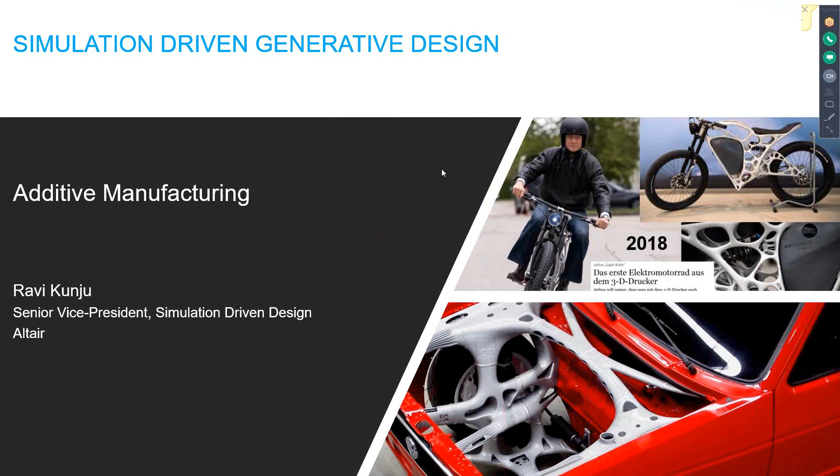Having said that, let's get started. The challenges of designing anything innovative, like what you're seeing on the screen, which is not an automotive component, but it's extremely important to put automotive things into perspective. This is a robotic arm, and the reason I'm showing you this is I'll build on that story in the next few slides.

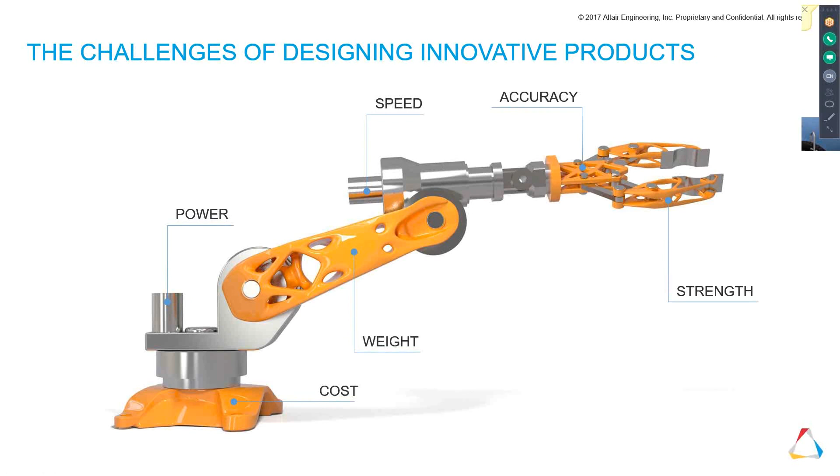Whenever you're making anything complex, something as complicated as an automotive, it's always a combination of balancing between the power, the speed, the accuracy, the strength of this gripper in this case, versus the weight. And when it comes to weight, it's not just the overall weight, but also the distribution of the weight itself, so that there's balance and efficiency in the design. At the end of the day, you also want to make sure that the cost of manufacturing it and the ability to manufacture it are within the controls of what you set up your ideas with. So it's always a balance between these.

And the promise of additive manufacturing is that it gives you a tremendous amount of geometric freedom. You are pretty much free to determine what you want with respect to how you can print them. But of course, there's a lot of other challenges that we'll talk about in the next few slides.

In addition to getting geometric freedom in your design to 3D print any types of shapes that you are not restricted to with undercuts and others, there's also a lot of possibility for part consolidation, where you can put more than a few parts together to make one component and reduce a lot of post-manufacturing and fabrication issues, dimensional accuracy, and tolerances.

The idea here is to create accelerated product development. If you have a good understanding of the performance requirements, you can rapidly create something much more quickly than the traditional process, which can be time consuming in terms of trial and error, build of tooling, and other aspects.

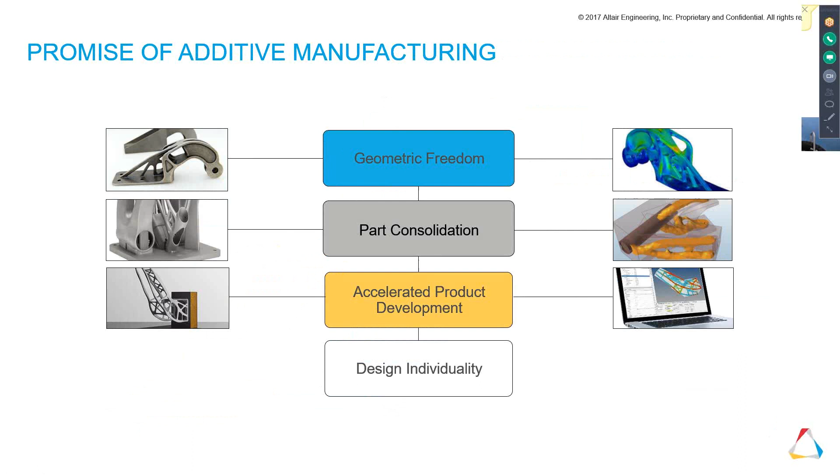The fourth aspect is design individuality, meaning you can create components that are very specific for a specific purpose. The bracket that you see here is an architectural beam, basically a joint and a truss, developed with Arup in the UK.

Very complex structure, lots of parts were consolidated into one. There's a tremendous amount of weight bearing that goes into it, but it's very structurally aesthetic and also a very critical component, and it was all done in one shot, meaning that under certain specific conditions, you can create specific products for specific purposes.

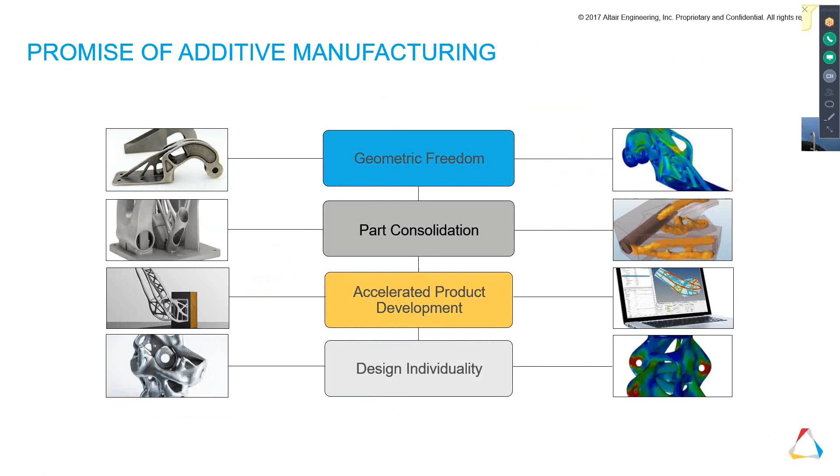So these are tremendously the promise of additive manufacturing. So let me give you an idea of topology optimization, which is basically a kind of generative design that dictates how shapes grow based on performance requirements.

Let me use this APWORKS bike that you see, which was first conceived as a joint project between Airbus, Altair, APWORKS—a subsidiary of Airbus—and EOS. This was an electric motorcycle, and the idea was to see how much we could reduce the weight of this, considering all the performance requirements, to set the context of what we are doing here.

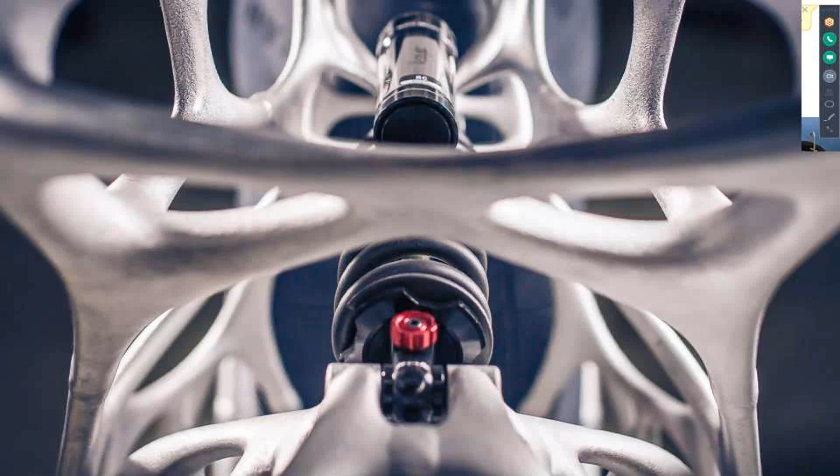The first step in this design process is to understand... here you're looking at the bike frame, how it was built, and we'll go over the process of exactly how this was put together.

The idea is first to start off with a design space, which is basically your operational space within which you want to grow a structure. You also identify certain non-design space which you do not want to touch, for example maybe something for a wire harness or a bracket mount.

Once you've identified the design and non-design space, the next step is to identify the loads and the boundary conditions. What are the boundary conditions, what are the ideal loads, and you need to extract these from various forms of simulation or tests.

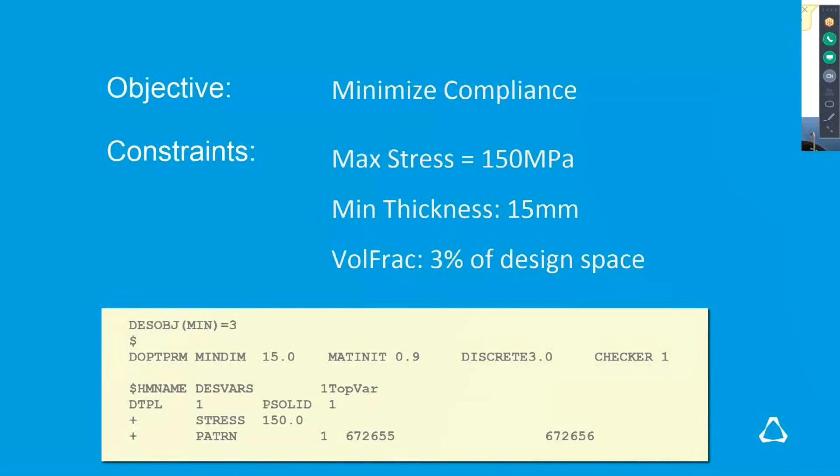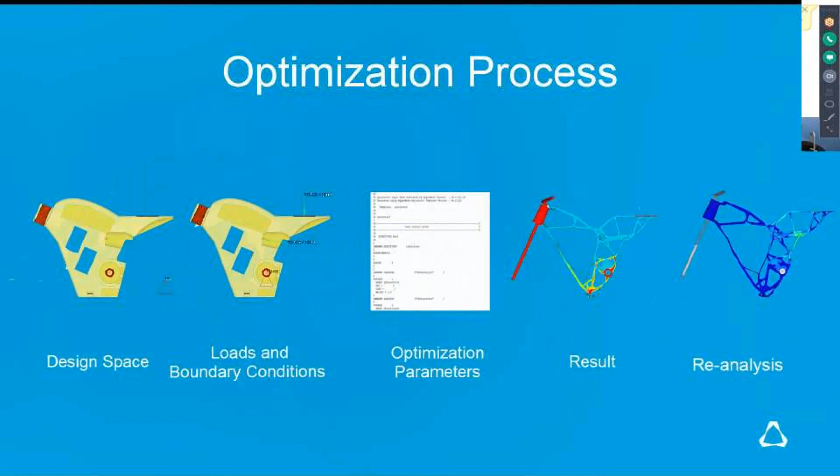Then you run through an optimization process, and the optimization automatically generates a topological shape based on any manufacturing constraints you might have given. The only constraint I was given in this particular case was symmetric boundary conditions, so that it grows symmetrically about a particular axis.

Once you've generated that shape, you put it back and reanalyze it to make sure it's performant based on the original performance requirements you had given. So the process is: you create a design shape, let the topology optimization generate the shape automatically, come up with a particular shape, and then put it back into performance analysis.

And what did we achieve here? This was, of course, for us to push the limits of what we could do. In this case, the entire frame of this electric bike is only 6 kilograms in total weight. There were special materials developed for this as well—a special titanium alloy made for this particular purpose.

A lot of work went into producing this vehicle, in addition to the topology optimization structure that you see. The overall weight of this vehicle is 35 kilograms, and it will go as fast as 80 kilometers an hour. So this is what is possible.

Over the last 15 to 20 years, since Altair introduced optimization through OptiStruct, we have hundreds and thousands of customers across the world using it on production products every single day. These are some examples on the screen—right from very different applications, you see a bike frame, a piston head, an aerospace bracket, an antenna bracket for RUAG that is actually circling the Earth today, and multiple other components.

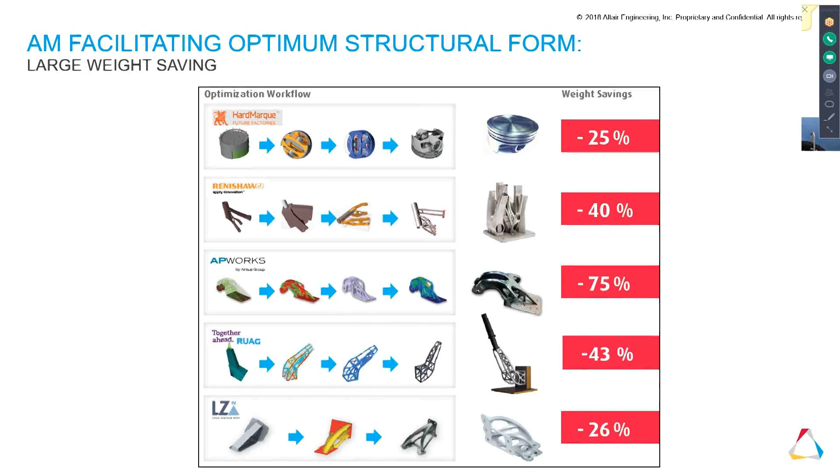And all of them, you achieved not only the performance requirements, but also tremendous weight savings as well. This is the promise of topology optimization that we brought into the world that everybody's using on a daily basis. So what is the potential here?

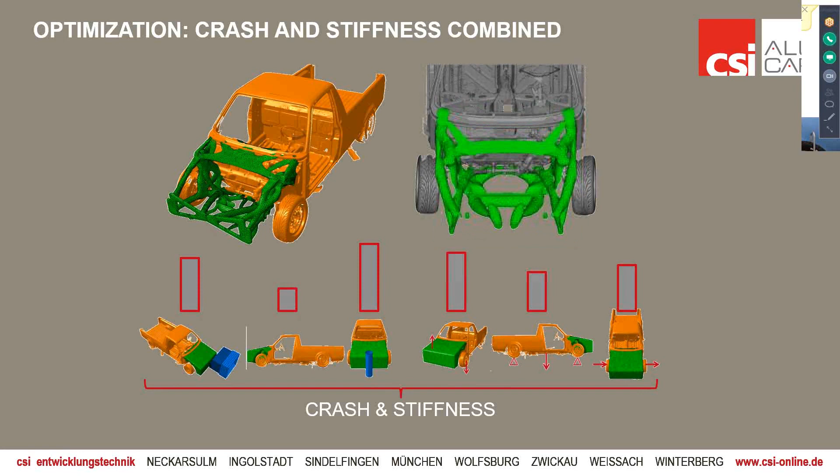Stretching it into the automotive side, this is another project we did with APWORKS as well as EOS and others. The idea was, how can we optimize an entire front structure for an existing vehicle, considering all the loads, in this case the crash and stiffness, all taken into account to build the topological structure, and then it was additively manufactured.

The structure has multiple purposes. Not only the ability to absorb the crash in the most optimal way, and also meet the frequency and structural requirements, but it also provided relief in terms of passive and active cooling as well.

You could see the fins were built into it for passive thermal management, and the structure itself was hollow, so it would also carry the brake fluid and the coolant in two different chambers. So it supported both active as well as passive cooling. And this was a work.

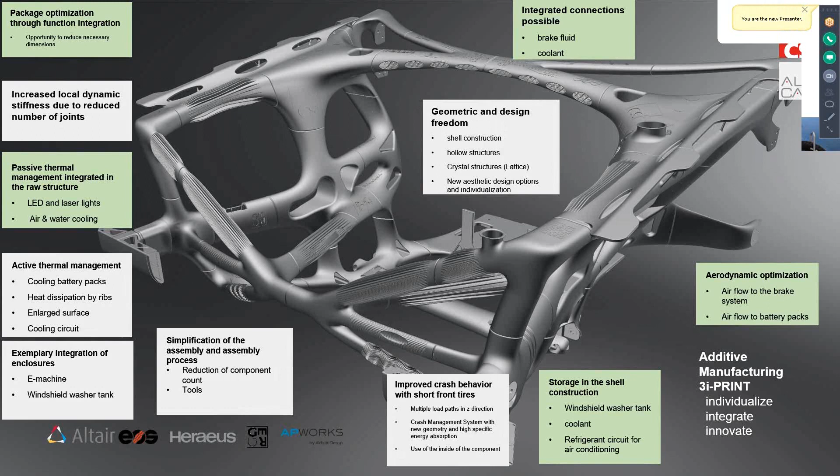It is definitely a piece of art, but at the same time it is pushing the limits of how much freedom you have to create extremely innovative designs, like you're seeing, meeting multiple purposes in one shot. This is all the parts that were printed, just to show you some pictures.

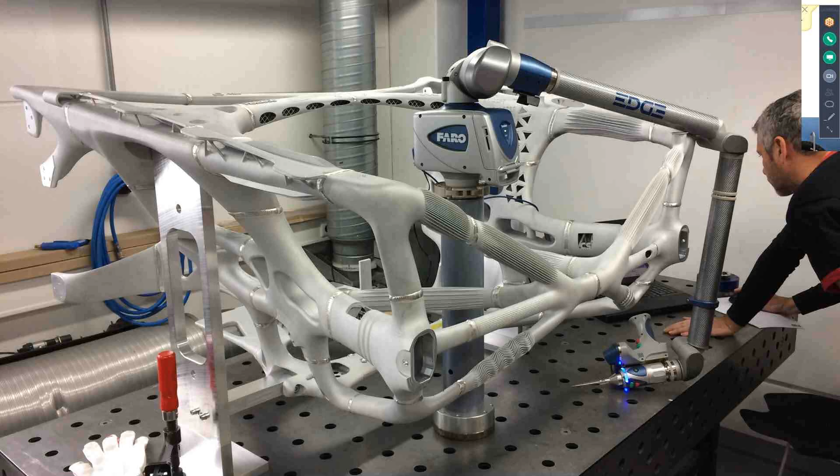Obviously there are multiple parts printed together and then welded together. There's a fair amount of fabrication that was done in this case as well. But the structure is beautiful, it's organic, and completely optimized to meet the requirements.

Now we've also extended this into a formal process called C123, where we basically break this entire vehicle design for creating innovative design concepts. We identify the optimal structural layout using freeform models, create the baseline shape, and then C2 is basically rapid optimizing, sizing the joints, and creating the joints using low fidelity models, and then finally putting it all together and doing the optimal sizing in the C3 stage with the actual joints using high fidelity models.

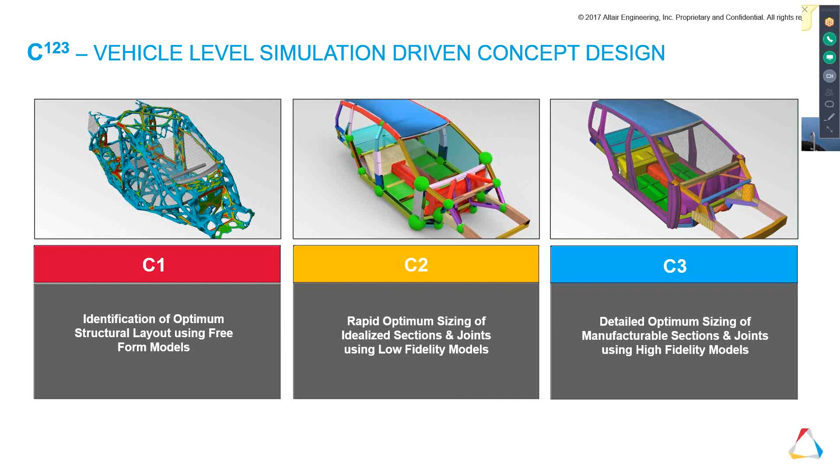So this is the process that many automotive companies around the world are starting to look at, and this is again the organic shape that you would have never imagined without the use of computers, and a lot of potential to use additive manufacturing, especially in the joint areas for making those joints as well.

But towards 94, towards the end of the 90s and the beginning of 2000s, ALTAIR introduced OptiStruct into the market. And that's when simulation-driven design started to come into the hands of the CAE community, where performance and manufacturing constraints were driving the design rather than you taking a design and validating it.

So what we did was, when we brought this, it was in the hands of high-end analysts and high-end engineers in the form of OptiStruct, but then we figured out it was too late in the process, so we wanted to bring it up front into the hands of designers. So we put it in a platform called Inspire, where designers could access the same technology but up front and with a very easy to use environment. And that was the advent of this.

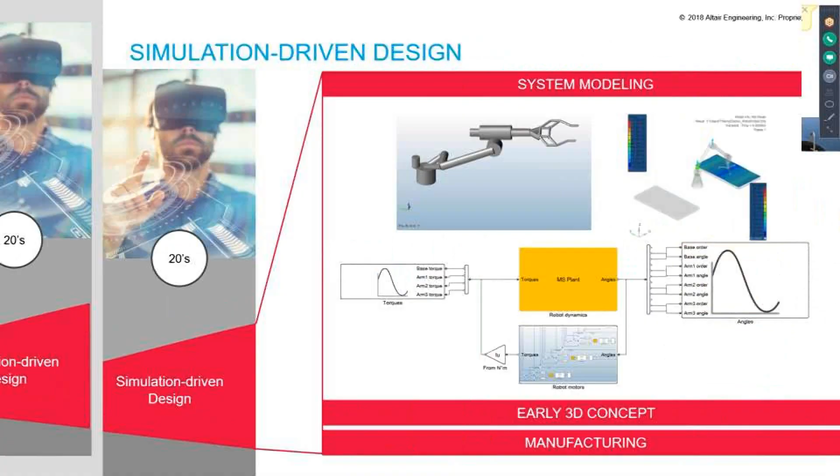And so we had to ask ourselves the question, what are these designers in addition to topology would want? So we break this down into three parts. One is system modeling. So we have a whole set of math modeling tools that can capture all the performance requirements.

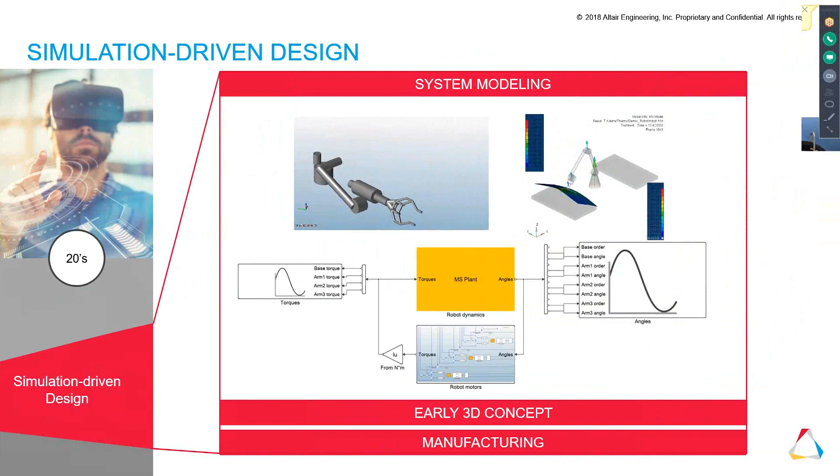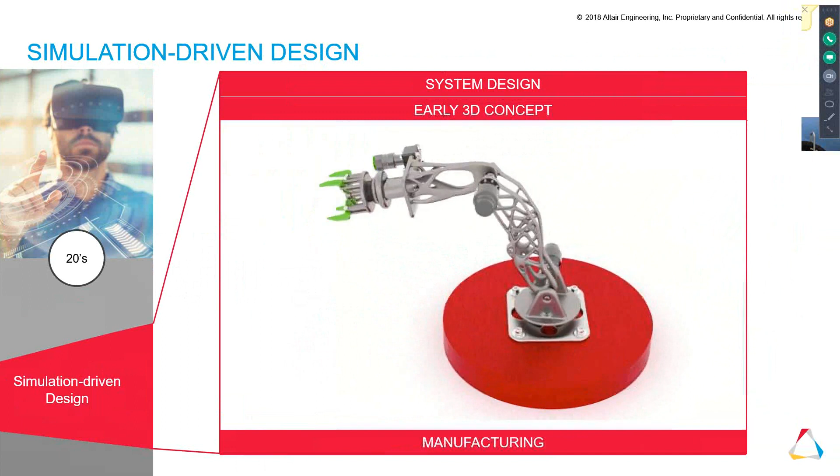You can take all your loads from multidisciplinary analysis or requirements that you have, extract those loads from a very high-end system-based modeling environment that we have. Once you've extracted those loads and performance conditions through the baseline system modeling, you can convert them into three-dimensional shapes, depending on what the manufacturing process is, whether it's additive or traditional manufacturing.

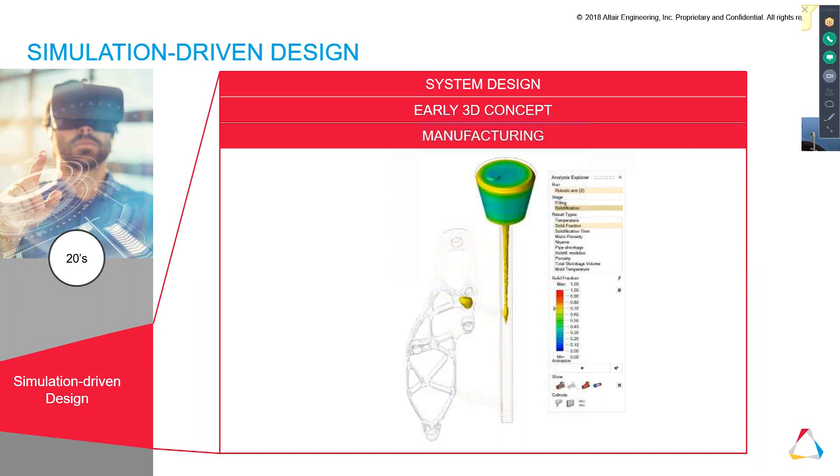Once you've done that, you also want to make sure they're manufacturable. So all of this we put together in one environment, which is Inspire. Here what we're trying to do is analyze the two things we identify: performance and manufacturability. How can we put these two things together to create efficient designs that take performance and manufacturability together?

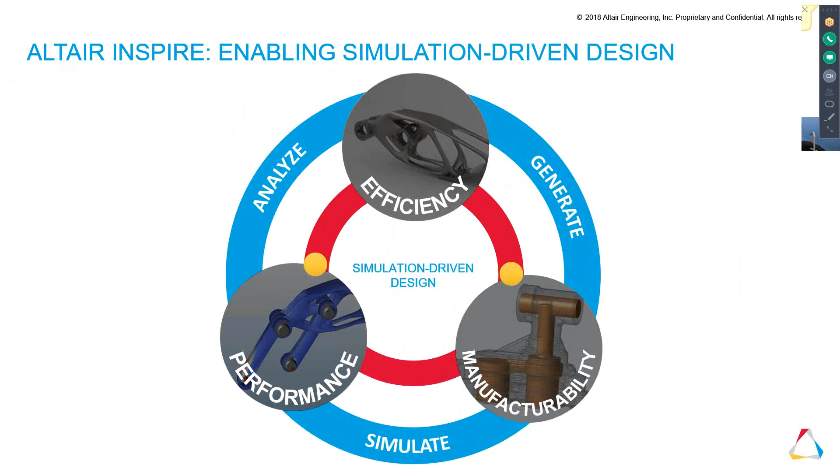Once those designs come in, you want to take them back and see whether they are manufacturable and able to perform under the conditions. So this is where you want to create one environment to analyze, generate, and simulate all your designs, early on in the design process, so you understand the manufacturing defects and problems as well. Having said that, we introduce Inspire.

We're coming into additive in a second, but the idea here is to be able to sketch, render, visualize, create structures and extract loads from the motion simulation and kinematic simulation, and create structures that are manufacturable. At the same time, go as deep as possible into the manufacturing processes, whether it's casting, injection molding, sheet metal forming, metal or polymer extrusion, as well as additive manufacturing, which is what we're going to look at next.

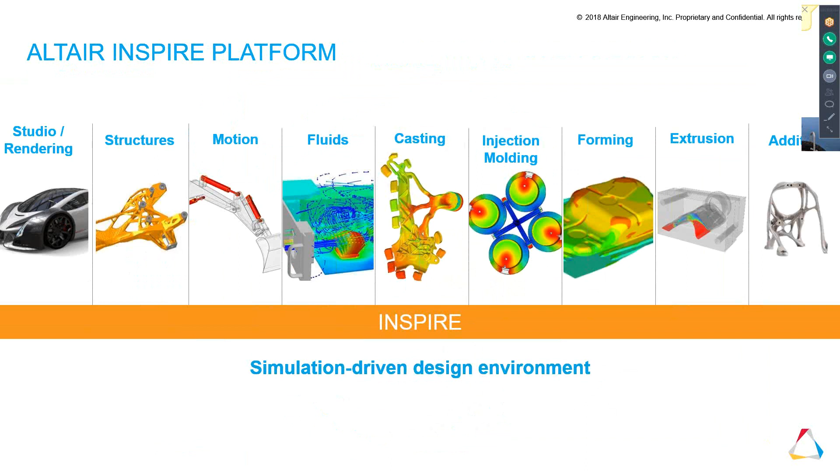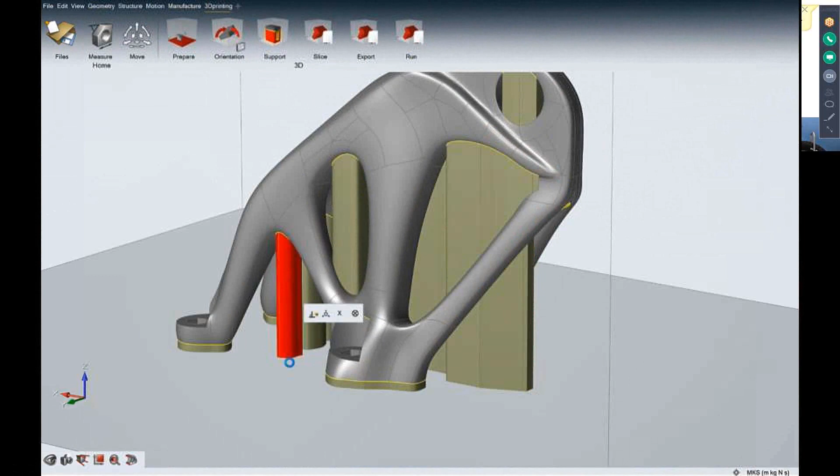So we put it all into one environment. Whether you're doing casting, forming, or additive manufacturing, you can bring in a component that you've generated based on the criteria you've described. You can create the support structure without having to go to multiple tools, all within this environment. And once you've created the support structure, which is all geometry, you can also go and do the numerical simulation and build simulation afterward, within one environment.

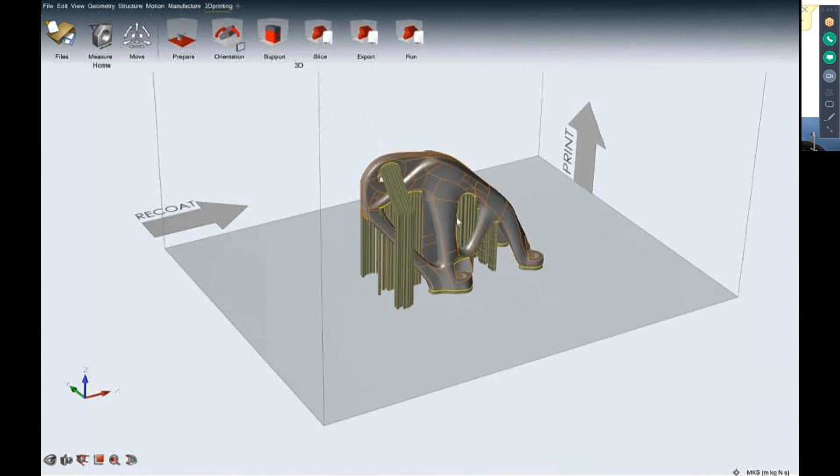So the idea is to provide end customers the ability to conceptualize designs based on manufacturing requirements as well as performance requirements, and go as deep as possible into the manufacturing feasibility arena and the performance arena, so the part can be put back into performance to see whether everything is coming together. That's what we're doing.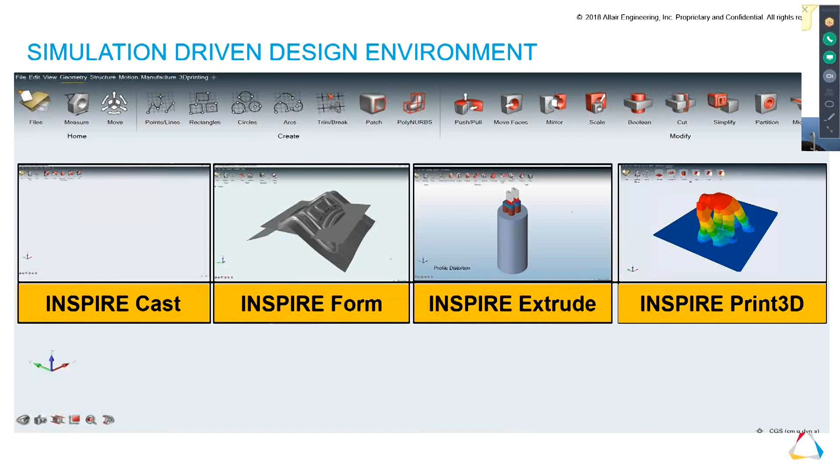So let's put this into context about how this works in the additive manufacturing process flow. Again, you have requirements. You take those requirements and create the baseline topology shape, which I call the rock candy. From the rock candy, you create beautiful surfaces using our polyNURBS. Once you've done that, you can go to build preparation and drive your build simulation there, and verify the entire process.

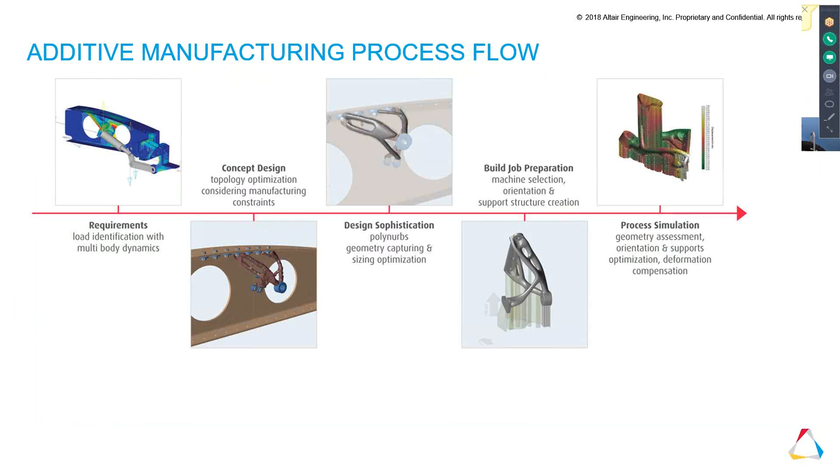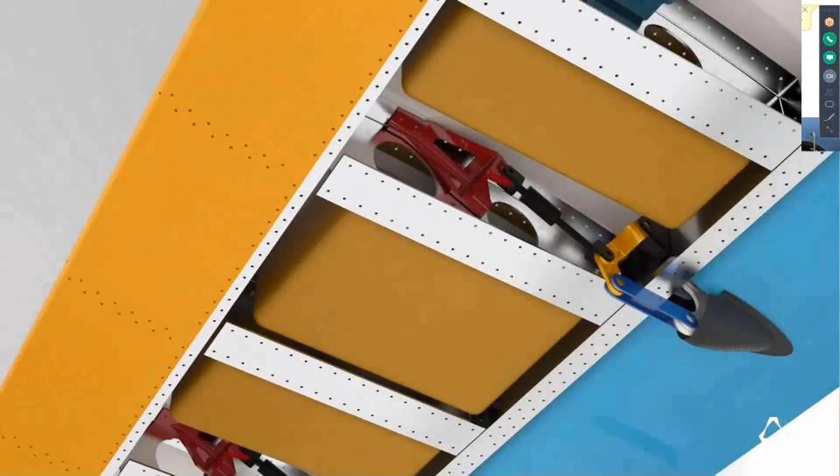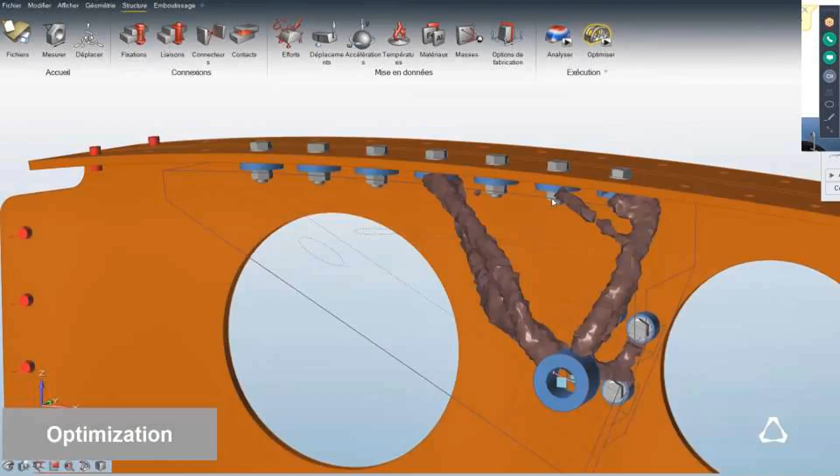Let's look at how this actually plays out. Here I'm showing you how this entire tool chain works in the context of a bracket. This is the original design. You take the original design, extract the performance loads, and first do a baseline run to see whether you can extract exactly the performance requirements. The idea is not only to create the first baseline run, but to take that and create a design space, then extract the topological shape out of those requirements.

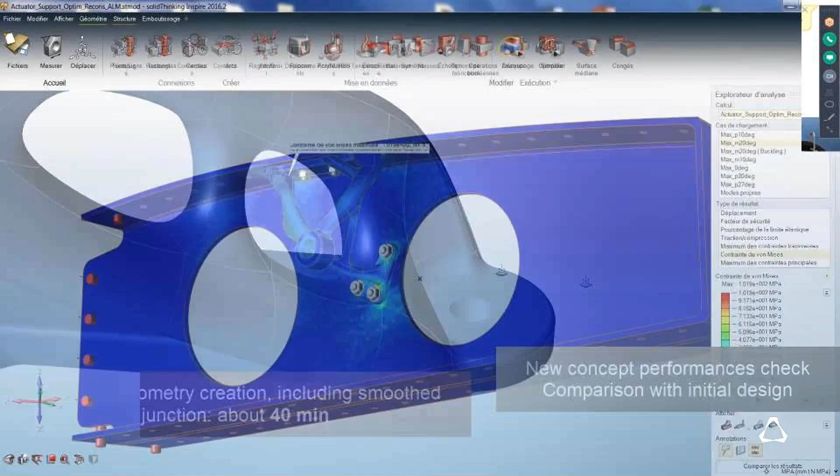Once you've created the rock candy, you can use polyNURBS to wrap around and create solid, nice surfaces that you're seeing on the screen. Then you can modify those designs and put certain features in there as well. Once you have them, you can put that design back again, re-perform it, and also evaluate it for the manufacturing process.

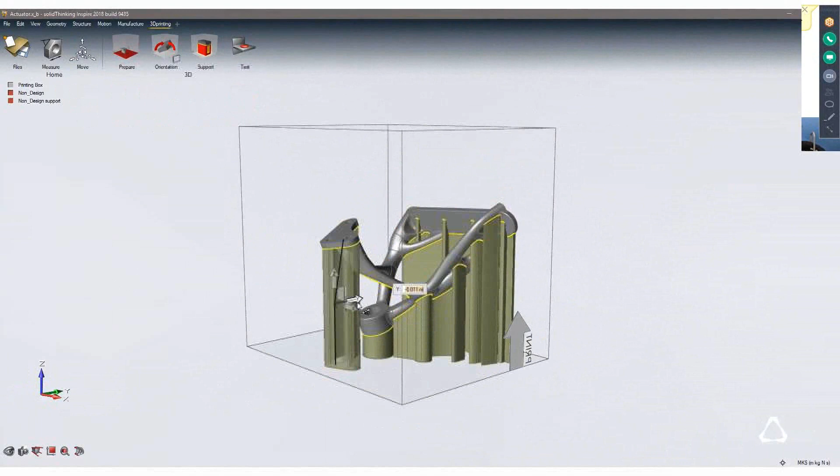In this case, you're orienting the part. I'm going to create a support structure, and I'm going through the process, not only having designed the part, but creating the support structure and doing the performance evaluation as well. So all in all, doing the whole process simulation, creating designs that are cognizant of manufacturing and performance.

In this case, you take out the old part and put in a new one where the stiffness is 52% higher, mass is 58% less, and the fatigue performance is much higher. So you basically take the old part and put a brand new additively manufactured component in there as well.

So what is the path to serial production? In my opinion, there are two things. The path to serial mass production for additive manufacturing is you need to create manufacturing constraints so that you create designs that are free of support structure, meaning you're not doing any post-processing. You can take it out of the printer, maybe do some heat treatment, and then it's ready to use. The second thing is being able to build the whole structure without distortion. If you achieve those two things, zero support structure and zero distortion, that's the path for serial production where additive manufacturing could come to automotive volumes.

Today automotive uses it for prototyping and so on, but if you want to go really fast and very high volume, these are the two things we want to achieve: zero distortion and zero post-processing.

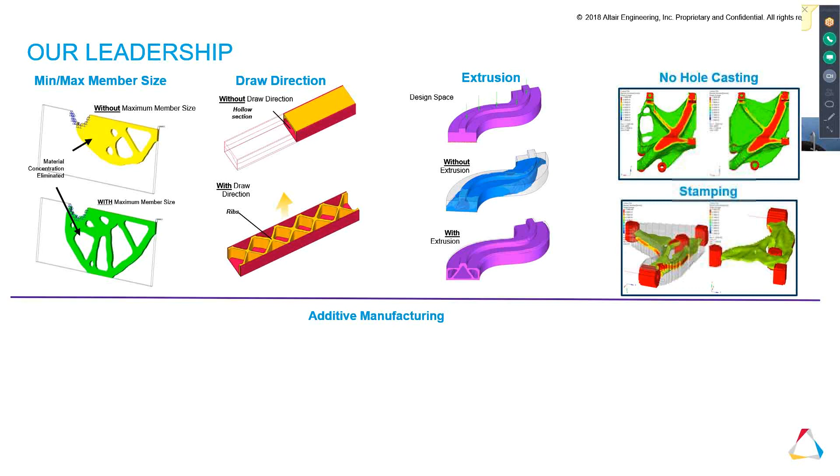Having said that, we have tremendous amounts of manufacturing constraints that you can bring to the table to drive the designs in a particular path. One thing is important to understand: when you're doing this kind of analysis, if you don't understand the manufacturing constraints, my advice is do not do topology optimization.

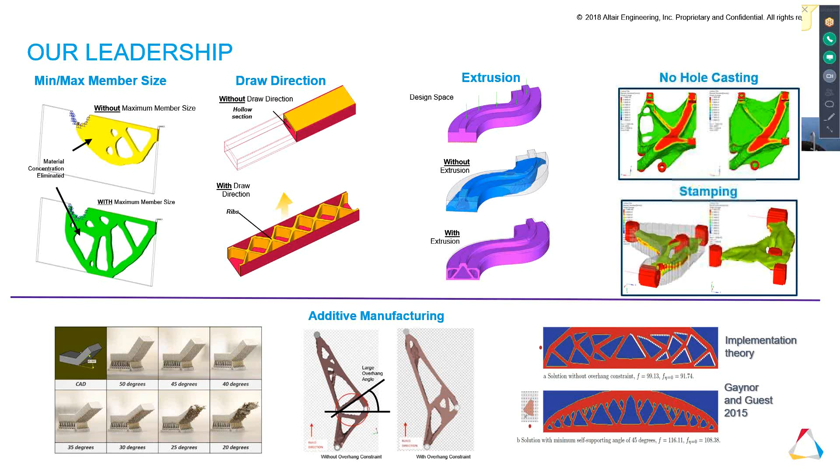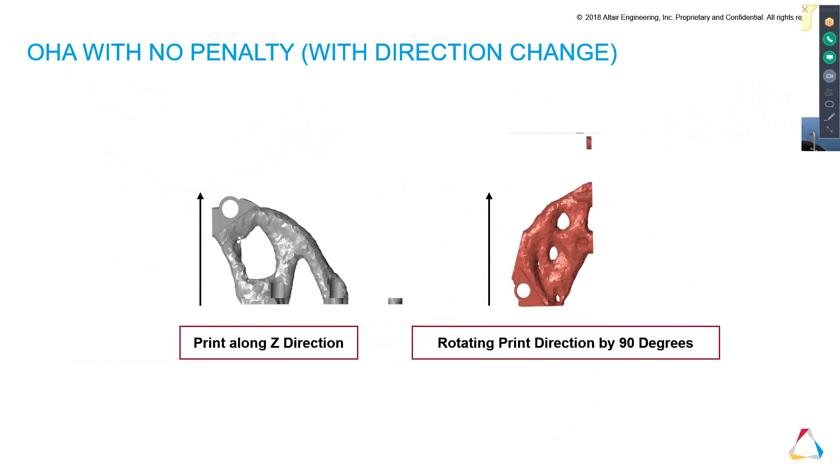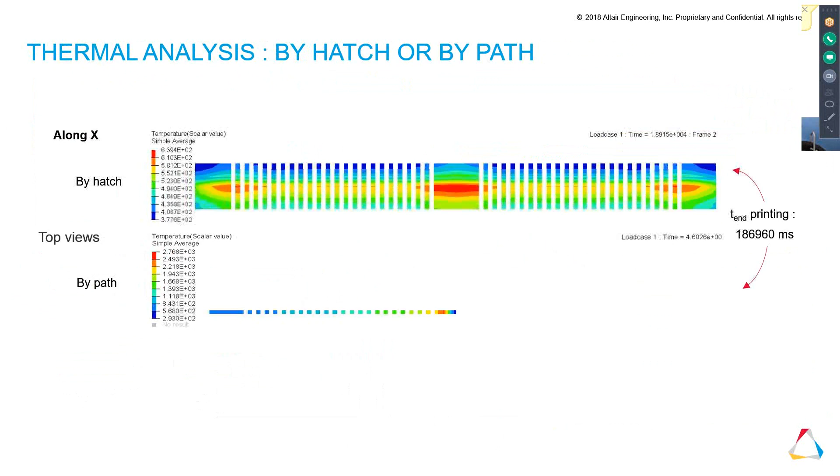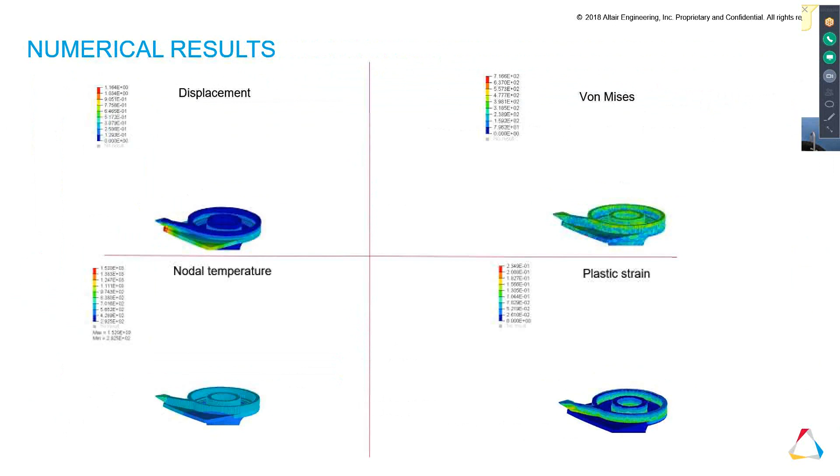In this case, we have introduced overhang constraints that allow you to generate designs free of support structure. You see these teardrop shapes because you're forcing it to create structures without any support structure at all. We can also do the whole numerical simulation, tracing the path so that you can control the distortion as far as possible. If you can create designs that are support-free and also distortion-free, that's the path for creating production volume, production intent volume with additive.

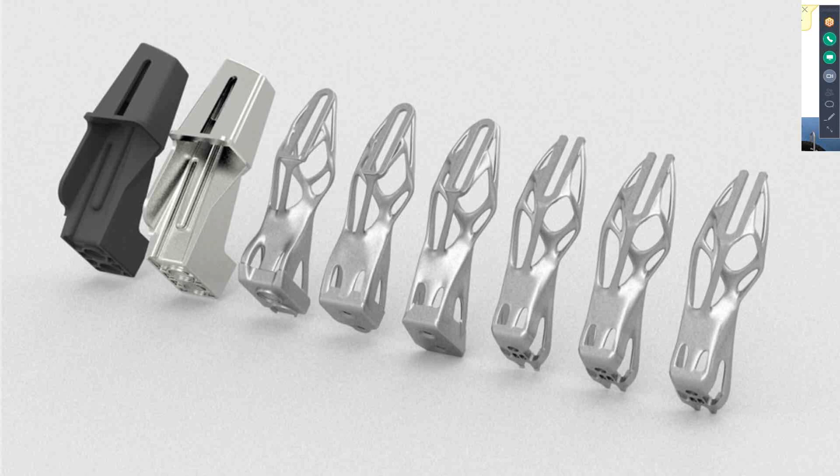I'm showing you some examples of what we have done. To put this in perspective, jointly with CAR, the Enlighten Award winners this year were BMW. They created industry's first serial production part using OptiStruct and ALTAIR's Inspire technology, using overhang constraints to create this particular part you're seeing on the screen that required no supports. It's just heat treated. They make 300 of them in one batch, and it's the first production part. It's on the I8, a roof latch, roof bracket, and it's on the BMW today.

They're presenting on our ALTAIR Technology Conference in Paris, and if any of you are dialed in or going to attend, we will make those presentations available as well.

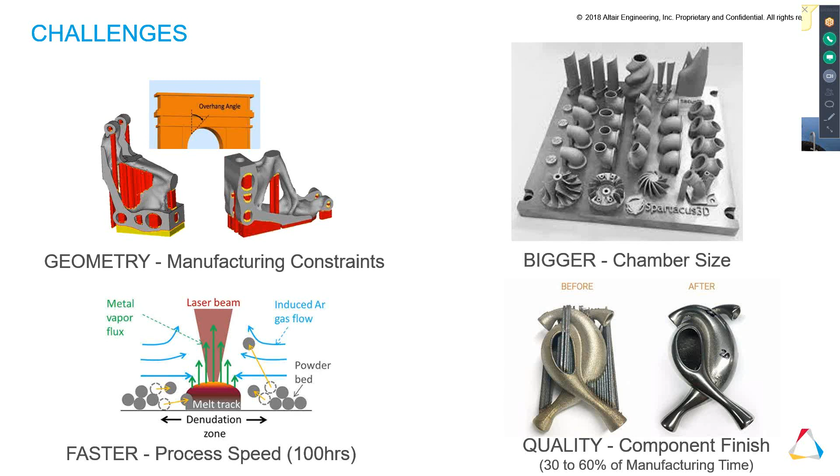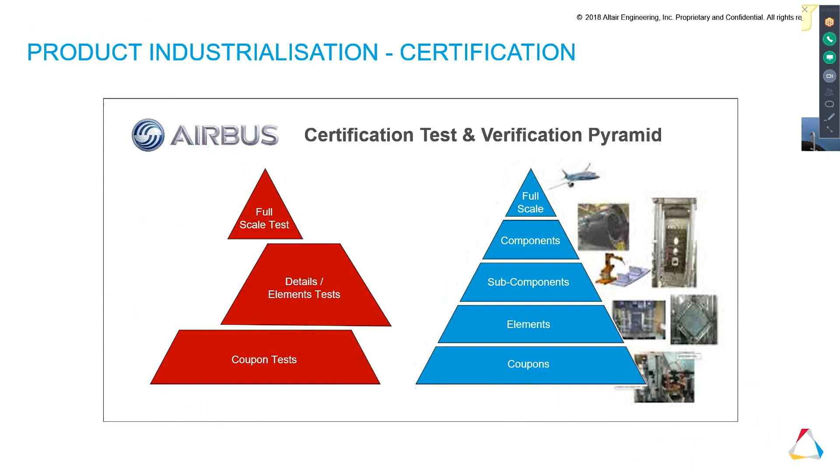There are a lot of other challenges as well, for adding more manufacturing constraints, including thermal distortion and controlling thermal overheating in certain areas. The challenge is always the chamber size—you're always limited by the size of parts you can make—and also the quality and component finish, the amount of post-processing required. And again, certification, which is a big challenge for the entire AM community. We're working towards all these areas to make sure we understand not only the build process to generate the designs, but also to capture the entire manufacturing process simulation.

So in summary, mass production of AM has not yet impacted automotive and aerospace for mass production, but it's coming slowly, as shown by the BMW bracket. Large-scale AM is being tested, and we definitely feel that topology optimization is a key technology for generating the product differentiation required for additive manufacturing.

With that, I'll hand it over back to Shashank.

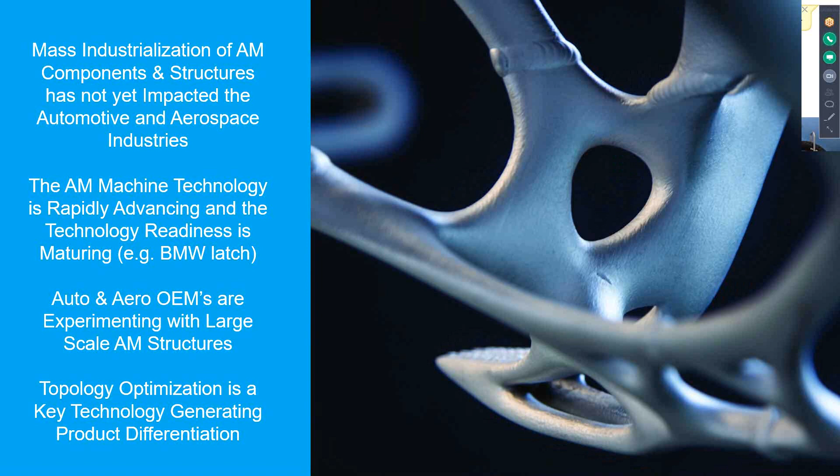Let's see, do we? Yes, this is Dave Darbyshire. Good afternoon, Dave, let me make you the presenter. In the meanwhile, if you can introduce yourself, go ahead, and we'll get you set up so your screen can be seen. Okay, can my screen be seen at this time? Not at this time. Let me make you the presenter now. Okay, I made you the presenter.

Okay, and you should see it. Yep, there we go. We see it. Okay, great, thank you very much.

My name is David Darbyshire, and before I even get started here, I would like to compliment Ravi on the presentation that he had done.

The most important thing that we need to recognize when it comes to 3D printing or engineering design processes is everything is interconnected. If you don't have a good design and you don't understand the ultimate goal, you're going to run into problems.

Am I still being heard? Yes, we can hear you. Okay, sorry, I heard someone say unmuted.

So the challenge that we have right now is having a better understanding as to what additive manufacturing is, and how it plays a role in the output and also the design's decision-making processes, as Ravi discussed earlier.

Some of the big challenges in additive manufacturing are people not having a proper expectation as to what 3D printing is able to produce, either as a concept model or as a finished product. That's the whole issue the entire industry is trying to face today.

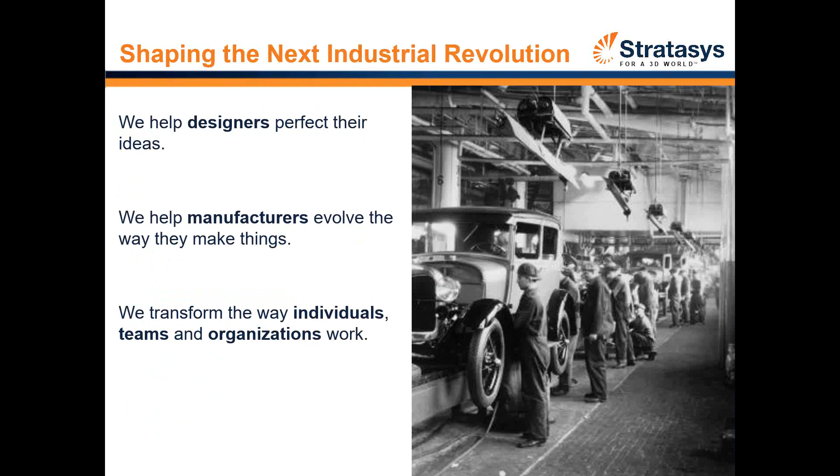The big thing that has changed is the methodology for what is called 3D printing. In the space of DASI Solutions, the bulk of our experience has been in the form of what's known as PolyJet and FDM, or fused deposition modeling.

For those relatively new to 3D printing, you have to assume everyone has been exposed to it, but you also have to understand the differences of the different technologies in the material delivery systems, because that can directly impact what machine, system, or process you ultimately use.

In the world of 3D printing, there are primarily two different types of technologies that are being widely deployed out there in the marketplace.

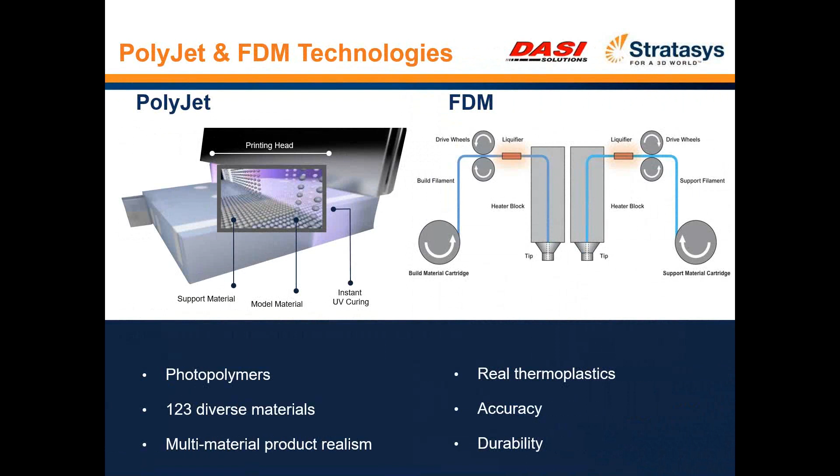One of them is traditionally the PolyJet market, where you're using a jetting system to layer material down and then using an outside curing source to change the material from one state to another. In some situations it's a powdered metal to a fixed metal, or in another situation you're doing a thermoset operation, or using thermoplastics to actually melt the material and deposit it where you want it to be.

The challenge in these different applications is not necessarily what's happening to the part on the build cycle, but what happens to the part after it comes off the machine. Each technology you deploy, whether it's PolyJet, requires a different type of post-processing and interaction that could impact the ultimate deliverable, and this has to be taken into consideration.

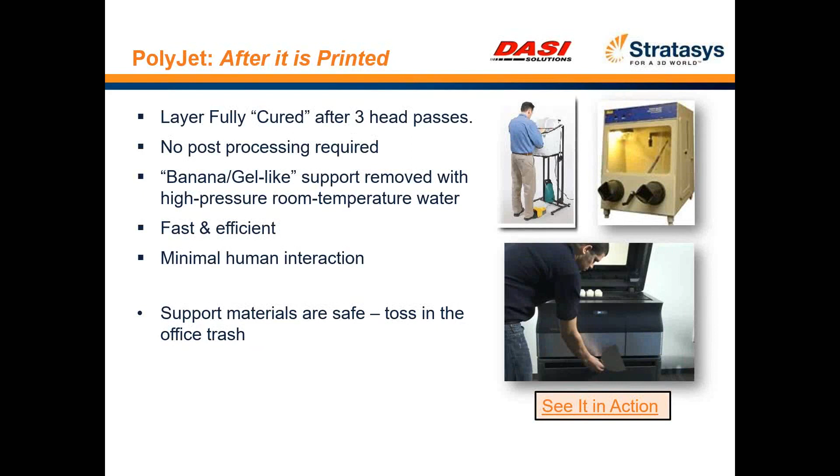For example, in the PolyJet scenario, the materials are being laid down and you don't have to worry about concerns of thermal stresses and shape shifting and materials not interacting properly with their support material. In the case of FDM, you do run into a bigger problem.

When the part is cooling down, are you getting sink marks showing up in the part? Are you burning off support material? Are you using a chemical to change the state of the process? Are you doing a lot of post-processing? And ultimately, what do you do with the part once it goes through these post-processing operations?

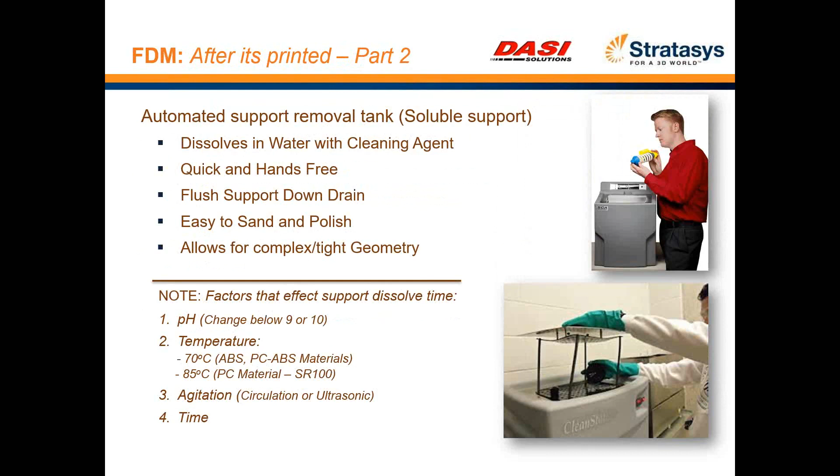So all these things must be considered when you start trying to decide what type of rapid prototyping or additive manufacturing process you're going to be using in your design setting.

There's a lot of technologies out there, and you need to have an open mind, not only to what you know to exist, but more importantly to what the industry is starting to produce, because some of your design requirements or performance requirements may not be directly in line with what you think additive manufacturing is able to produce for your ultimate goal.

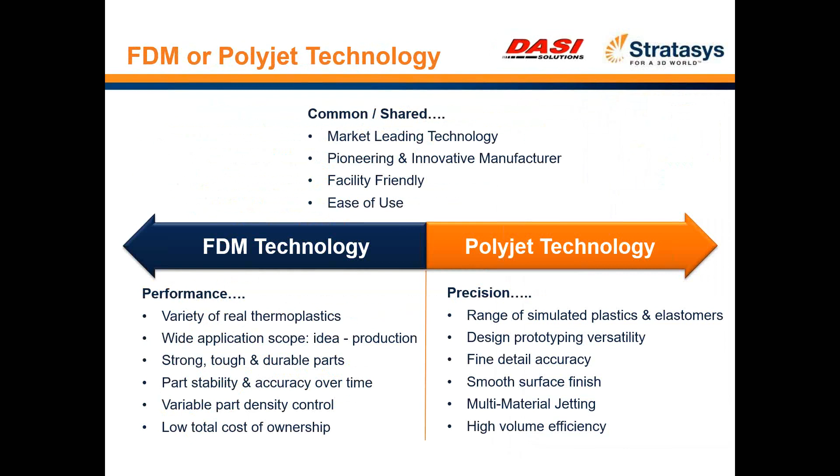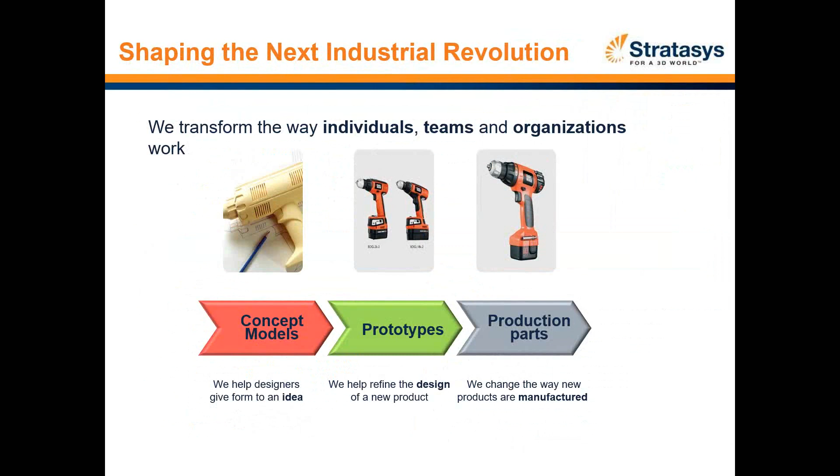3D printing is changing the way we go about product development and manufacturing. At one time it was strictly used for creating concept models and traditional prototypes, but we've gone beyond that. With additive manufacturing and material sciences, we now have machines that produce parts faster and get closer to end user customer parts.

When you're looking at a machine or considering a service bureau, internal or external to your organization, there are new variables coming down the line, like where do you get your parts from. Most importantly are the controls that various systems have based on their ability to produce a consistent product.

Some systems are very small in nature and low cost, as low as $300, to other systems that are extremely expensive. You pay for what you get when it comes to selecting the machines or process. For example, the IDEA machines are considered the lower, $500 to $3,000 class machines. Those are what you'll find in your typical high school, college, university, or at the end of a row of desks in an engineering office.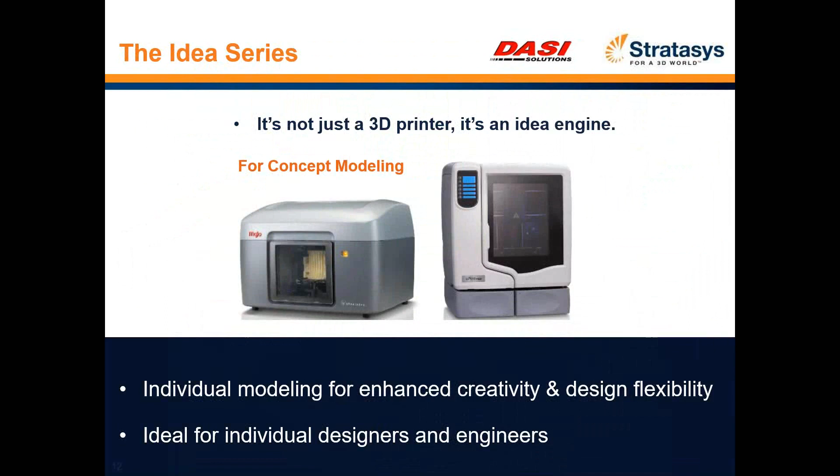They're designed to get something in your hand quickly and allow you to make very fast design decisions to go back to your engineering process.

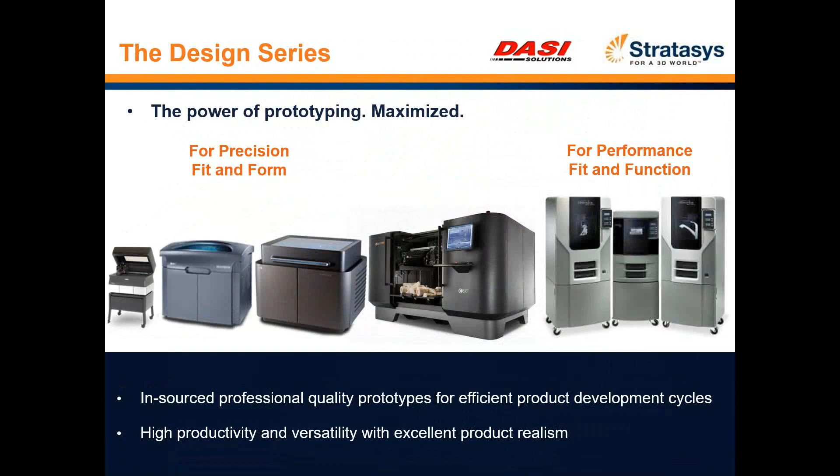When you get into the design series, you're investing a little more money, anywhere from $50,000 to $250,000. These machines have a variety of materials and different processes that can be used, but each machine has its different strengths and weaknesses, and you need a better understanding of what this equipment is able to produce.

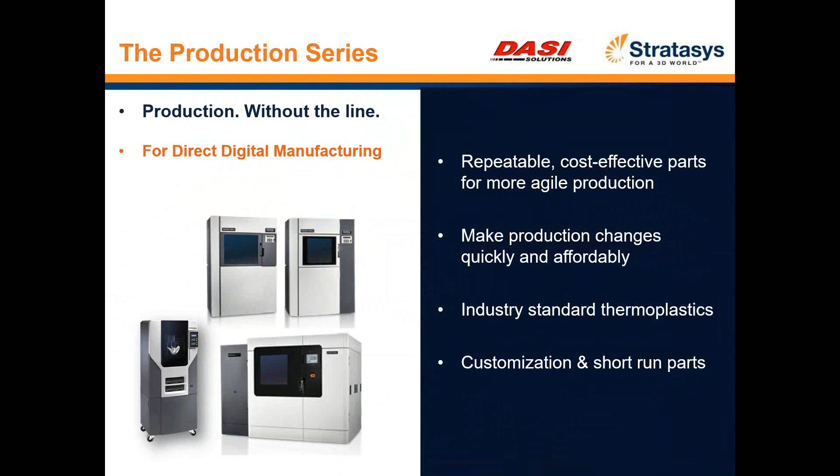If you decide you want to create production-ready parts, things that will actually be used by the end consumer, take the time to go see the equipment in action. Look at how other customers are using these technologies and gain an understanding of the entire workflow process. In some situations, somebody will tell you a 3D printed part takes about 20 hours to build in a build chamber, but in reality, when it comes to post-processing, like in an SLS process doing sintered metals, sometimes the cool down and post-processing takes longer than the actual build cycle.

So again, go outside of your industry, take a look at what other people are doing, get a feel for how people are using these technologies and how they apply to what you may want to do within your own engineered environment.

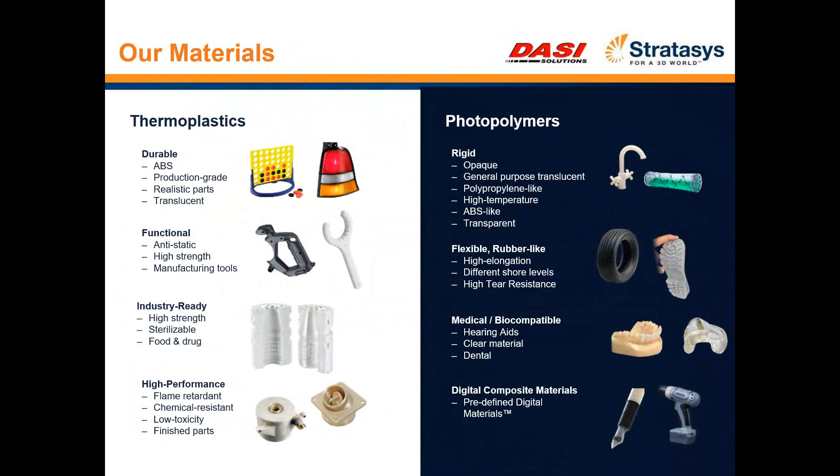Whether it's designing the actual end product, or in some situations you'll be designing tooling, limited run injection molds, or limited stamping dies. In some situations you'll print an actual part and metal plate it, paint it, or polish it. It all depends on your individual given use case.

The biggest thing everyone on this call needs to keep an eye on is the materials being used out there in industry. Although the bulk of my experience has been with PolyJet and FDM machines, new delivery mechanisms are creating more mini robotic work cells where you're combining extrusion processes with painting and plating processes, all done simultaneously.

There are built-in processes in metal sintering device systems coming out in the marketplace using what's called direct energy deposition, where you use a traditional FDM style printing with an alternative energy source to burn off unnecessary material to get new mechanical properties you may want out of your final part.

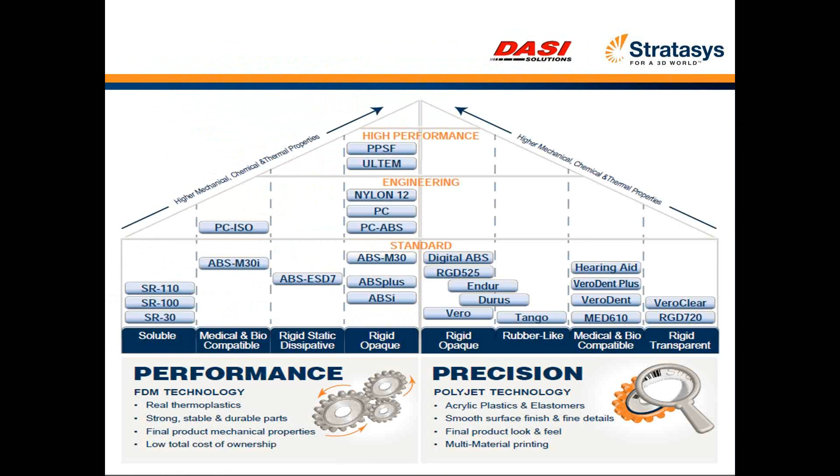All this is changing every day. So if you consider yourself a subject matter expert in 3D printing and additive manufacturing, and you haven't been to a trade show or attended a user symposium in the last year, your knowledge and understanding of what 3D printing is capable of is probably grossly out of date.

There's a lot of things coming down the market, and it's going to directly impact and change the way you take that CAD data that Altair engineering is creating, those organic shapes, those obscure things that were never able to be fabricated in the past, and be able to get them into the hands of your consumers and then into the hands of your engineer and be more successful.

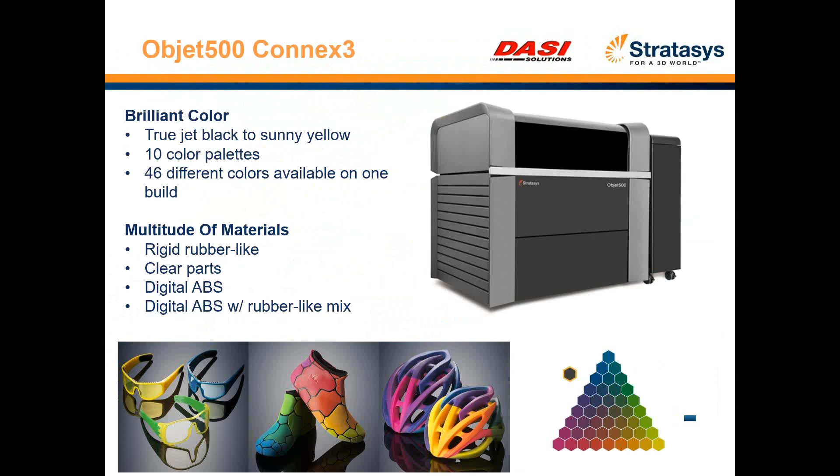So with that, I would like to wrap up and turn over control and address any questions or concerns that the group may have.

Thank you very much, Dave. That was fascinating, and what was great is that it was a great fit with what Ravi talked about. He talked more on the design, and you talked about the different manufacturing techniques. Let me start off, if you don't mind.

Is there a set of guidelines or something that users can at least get them in the right direction in terms of what type of machine to use and what type of material to use based on the part application they may have?

I think you just answered your own question there. It all depends on the application that you have. The application will drive what machine you ultimately pick to do your 3D printing.

In Ravi's presentation, when he had the vehicle body designed using an optimization structure, he did not necessarily print out that body in the final metal part it was ultimately going to be. He created scale models of smaller plastic parts used for design reviews. So even though the ultimate part is a metal part, you can use plastics or SLS or SLA type processes to cost effectively share design intent.